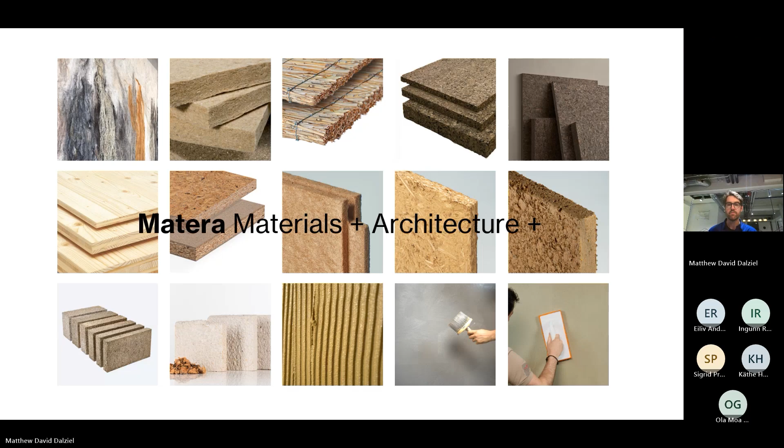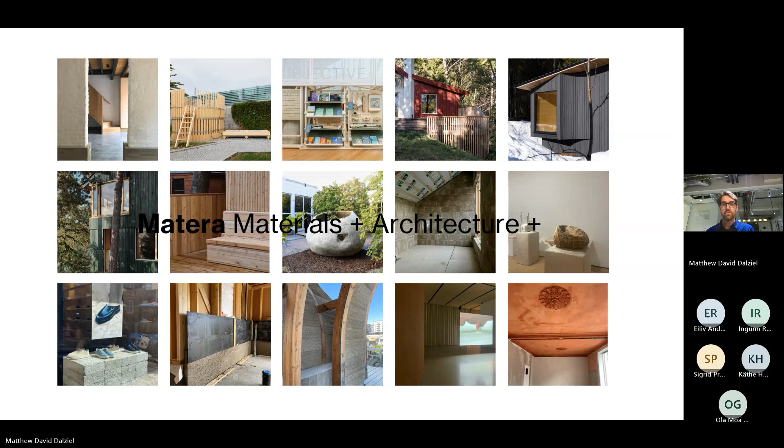The story of Matera starts really 10, even 15 years ago, when I started to play around with bio-based materials, living in London as an architecture student and then as an architect, and then continues through to today. So I will talk through these projects and through each of the materials as we go.

The first thing to say is that, of course, the discourse of sustainability is highly complex. One of the things that I've been doing to focus the way that the practice works and how we work with others is to try to have some kind of key principles.

One key principle, of course, is that this is a design-led practice. So we are as interested in the beauty of these materials as we are in the carbon footprint of these materials, or their capacity to perform as energy efficient partners in a system.

I think that's really important, to remember also that sustainability can be beautiful, and the practice of making a kind of regenerative architecture can be an engaging, creative practice.

One principle from the technical side that we really focus on, which helps us to get there, is that we're very focused on natural ventilation. I personally think that this diagram that comes first from space research and then becomes the passive house standard, which has resulted in most new buildings being made as a plastic bag regulated by a machine, is a very strange way to treat our species.

We should have a physical relationship with the materials around us, and making it that the first material we touch is really like a plastic lining which isolates us from the world is kind of philosophically and technically weird. So the approach that we take is making sure that the wall is vapor open and that the materials have a capacity to breathe and to hold moisture and hold heat. And that tells us a lot about the kind of materials that we can use.

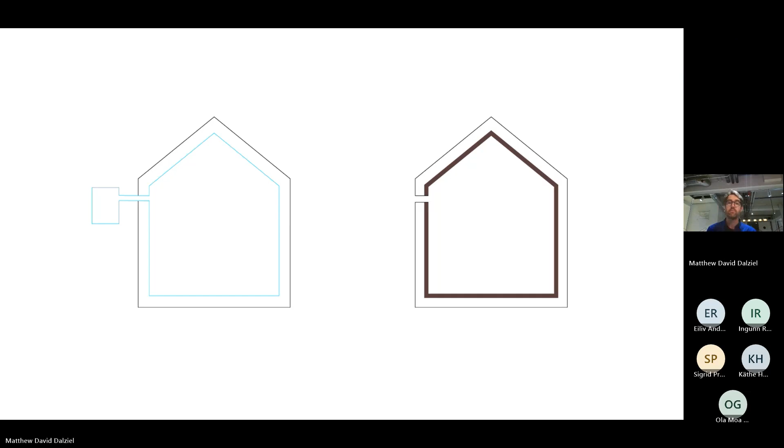When you start to look at how to build a wall as a vapor open system, you have all of these layers. And sometimes a single material can operate as all of these layers. That's a kind of architect's wet dream in a way, to make a solid stone wall that can be thermally massive and insulating and materially rich all in one layer.

But often, and especially in competition or comparison with the way that we build as a standard form at the moment, what it means is looking at a lot of different layers and how they react. One thing that's very interesting, and I think a big selling point for biogenic materials like these, is that the way we build at the moment with these kind of technical layers and airtightness and plastic means there's a high degree of risk of failure.

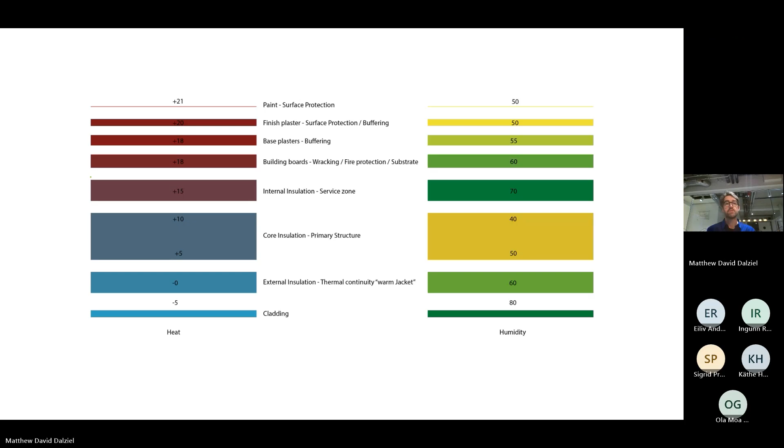If tapes fail or membranes fail, then the rest of the layers fail. Whereas when you start to build with natural stone, cork, clay, wood fibers, hemp fibers, and all of these materials on the table here, all of these materials have a capacity to dry out. So they can stay there for 1,000 years, if the roof is on. So there's a way in which not only are these materials already inherently low carbon because they're made mostly of harvested plants and some minerals, but it means there's a kind of inherent longevity in the materials.

Just to say a little about where I come from. I speak with a bit of a mid-Atlantic accent because I was born in Canada and grew up in the UK. I studied architecture in the UK, and afterwards worked for really two practices over the course of 10 years before coming here. The first was Haworth Tompkins, very well known for their cultural buildings, particularly for transforming and extending historic theater buildings. I think that's really where I learned a lot about the capacity for materials to tell stories, to draw histories forward, to talk about the future, and to be these tactile agents, almost like performers in the space. That's been really formative for me.

The other element, which then naturally evolves into what I'm doing now, is that I worked for 5 years at Webb Yates Engineers, running a small architecture team within that studio with a partner. Webb Yates, some of you will probably know, have been for a long time very active in promoting the use of natural stone as a structural material. They have this project called the New Stone Age, and in fact now they're building a 12-story residential building with structural stone.

This was the first one, Clerkenwell Close. They built it with Groupwork + Amin Taha Architects, really quite brutally expressing the structural stone. I think that particular project, and a lot of what they do within the practice, is a great example of how approaching sustainability from a creative praxis perspective and method is super exciting.

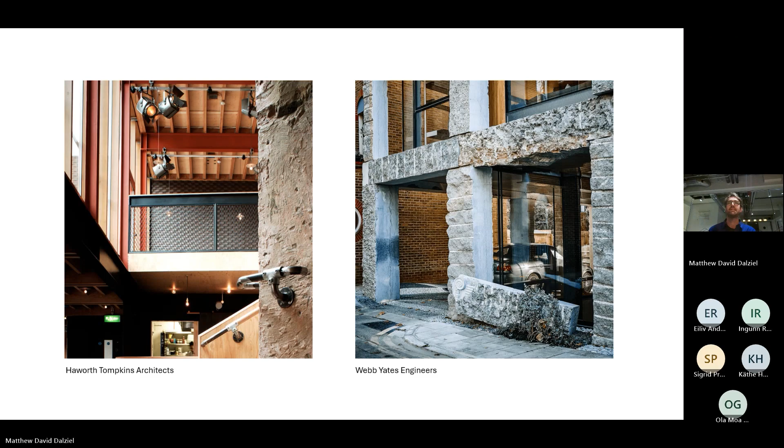And it's a different perspective on extraction. That extraction can be a bit like, when we extract, we use the whole animal. Like when we kill the pig, we feed the pig and then we eat the pig. So I see natural stone as a kind of responsible way of using these more precious materials within the palette.

During those 10 years, while working in those two practices, I was restoring a ruin that I was also living in at the same time. This was my kind of hands-on tuition on bio-based materials, which was sort of forced upon me because I managed to buy this bit of historic London, which had been utterly destroyed by modern materials.

This is a bit of the plan on the right-hand side, where the dining room and living room are, is the servants' quarters of a larger Victorian house. The rest of the plan is an extension which tries to express a playful nod to the bay windows that happen on the rest of the street.

What had happened was that the house itself had been injected with chemical damp-proof courses and plastered with cement, lots of plasterboard and glass fiber insulation, and it had become virtually uninhabitable because it was so damp and cold and filled with fungus. The only thing to do was to take all of that away.

This is a 50 square meter house, and we took, I think, 70 cubic meters of waste out of this building by scraping away layers. We literally filled the yard, where the extension came later, with rubble, and then experimented with using lime, hemp, and sheep's wool, developing relationships with local forests where we get oak and larch from English forests. I did all of the work myself on weekends over those 10 years, and really got to know what's happening.

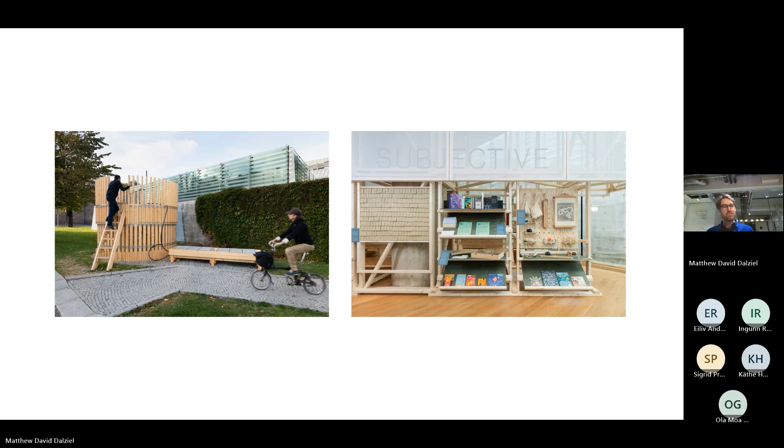Then outside, with students from a studio I was running at the time at Aarhus, we built this installation, a 14 cubic meter compost pile that heats a public bench through the bioreaction of the compost. Through making that project, I started to think about what I could do with 14 cubic meters of compost, and later the project—the house and garden I'll talk about—came to be.

It's interesting to think about how the architectural baggage we've inherited from the neoclassical tradition of having heavy bases isn't essential—it's just, in fact, an architectural style. Not every project needs a heavy relationship with the ground, especially in urban environments, but there are many projects where a much lighter relationship to the ground is possible.

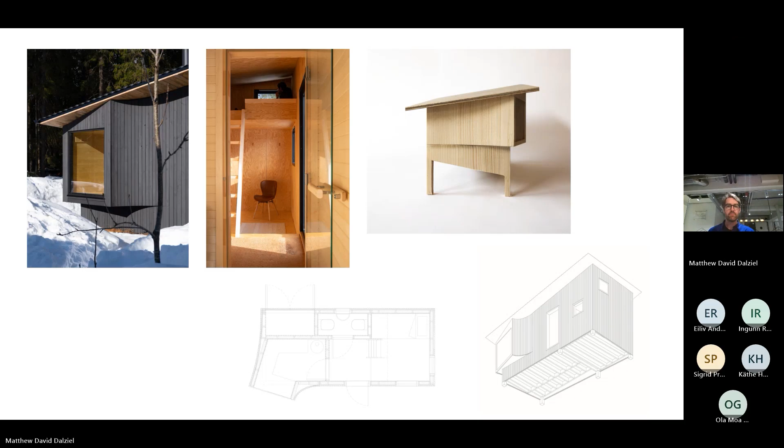Then another project came in the next Triennale, answering the question of mission neighborhood, asking about more-than-human neighborhoods. When we think about making good neighborhoods and good cities, we almost always immediately think in the human perspective. So this installation was talking about the tradition of food forestry and agroforestry, which are really in parallel to regenerative construction and architecture.

Agroforestry is revolutionizing, or at least troubling, industrial agriculture, and you see a lot of moves towards companion cropping where forest methods are being used. This was an installation where a living forest is placed inside a hemp and clay sculpture where you can put your face in a hole, and you're transformed down, like Alice in the Looking Glass, to a scale where you can imagine being in this food forest.

And those two projects, the lightness on the ground and this idea of the food forestry project, became the house which I built for my family, which is also, because I haven't quite finished it, the main case in a works-based PhD that I've done at Aarhus.

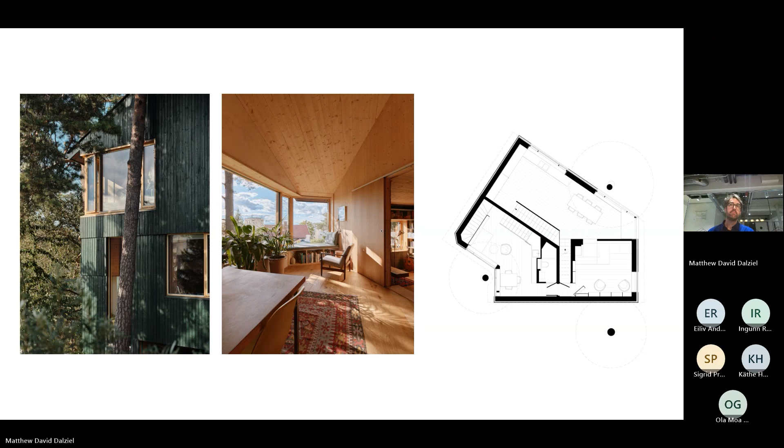And so I've been speaking a lot and working a little bit with Norges Vel, trying to drop the ban on hemp and develop that discourse. The hemp for this house, in fact, came from France. But in the meantime, the first refinery for hemp shiv and hemp fiber in the Nordics opened in southern Sweden. So now we get our hemp fiber from Ekolution, southern Sweden. So it's coming closer all the time.

And this is how the house is built: the CLT elements are basically the internal walls and the floor and roof structure. So it's a kind of house of cards with no structure on the outside, all prefabricated. Then the outer walls are a 6 centimeter wood fiber plate with lightweight stud work, 50 by 100 studs, that are basically there to hold the wood fiber in place.

We did that because the process of casting hempcrete, which is a blend of hemp and lime, when done as an in-situ system, needs formwork. By having that wood fiber plate on the outside, we not only protect the building from the elements and allow the drying time of the hemp to extend into the shoulder season of autumn, which is essential in Norway, we also get a little spike on the U value from that 6 centimeters of wood fiber. It's permanent formwork, so it decreases by half the waste that's used, whereas we reuse the inner formworks, maybe 6 plates of OSB for the whole house that we just moved around. So the inner plate is a sacrificial form, and the outer plate is a permanent formwork.

We geared the thickness of this wall so that it absolutely just passed. We did a total energy calculation and made sure that we were only just in the green in the SIMIEN calculation, because what we wanted to know was that all of the gains in energy efficiency we had were gains because of material, not gains because of extra performance.

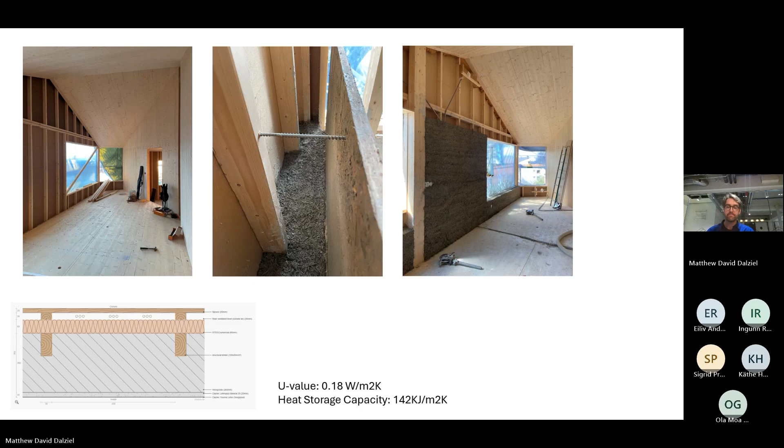The heat storage capacity is an important element of that first principle I talked about, where fresh air is coming into this house, and the energy used to heat that air is held in the walls. So when you open the windows to get extra air, if you have 30 people over and the CO2 goes up, you could open the windows for 10 minutes, close them, and the temperature is essentially the same in the house, because the delay that comes from having the mass is a kind of performance the house is capable of.

So the palette of the house - this is actually the acoustic wall between the apartment and the house, because it's a kind of double house.

We used clay plates, wood fiber, hempcrete, and wood fiber on the floor and CLT. On top of the hempcrete, there's 15 millimeters of clay plaster, a base plaster, and then a fine finish plaster, which comes in lots of lovely colors.

This project was then the beginning of developing these trade relationships, which we now have, where we're the kind of ambassador for all of these products in Norway.

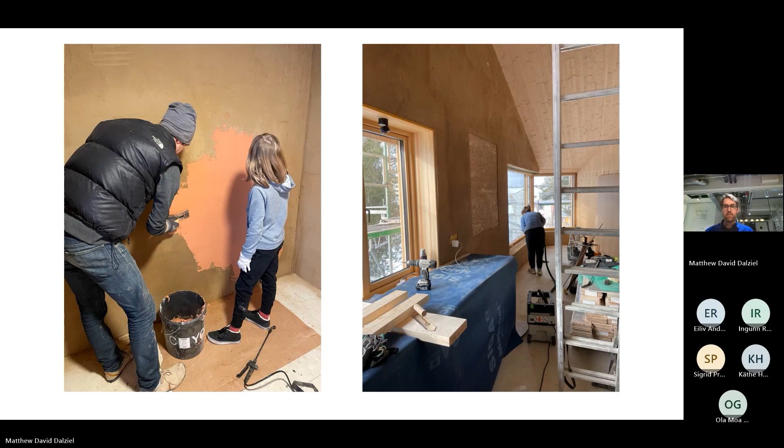And then I want to talk a little bit about... Go on. Yeah, just before, was that floor - one more please - was that floor heating? Yeah, so there's water pipes.

This house could be completely naturally ventilated. We took the approach that because we needed heat anyway, it made sense to use a waste heat air pump - so it's an air to water heat pump.

One key principle for me in terms of sustainability is that architecture should be slow and technology is fast. That means the technology should be hot swappable, and buildings designed to last for 500 years should not be too tightly tangled with anything that's going to become obsolete.

So this building has one machine, which is plugged into one duct, and we can swap out that machine. The interesting thing about an air to water heat pump is that it has two coils: one connected to the heat exchanger, and the other you can connect to whatever you want. So we've been thinking about - can we connect that to the compost pile?

Can we connect that to passive solar heating on the roof? So there's also possibilities for upgrading where that hot water comes from, but the hot water is the heat source and the domestic hot water in the house.

That makes a very comfortable environment where the bedrooms are downstairs and the living spaces are upstairs, so the bedrooms can be a lot cooler. All the fresh air comes in on the lower level, and the upstairs becomes this kind of warm cocoon where the hot air rises and is captured right at the top of the house, in a kind of typical naturally ventilated diagram where you have a vertical section with air coming in and making its way up.

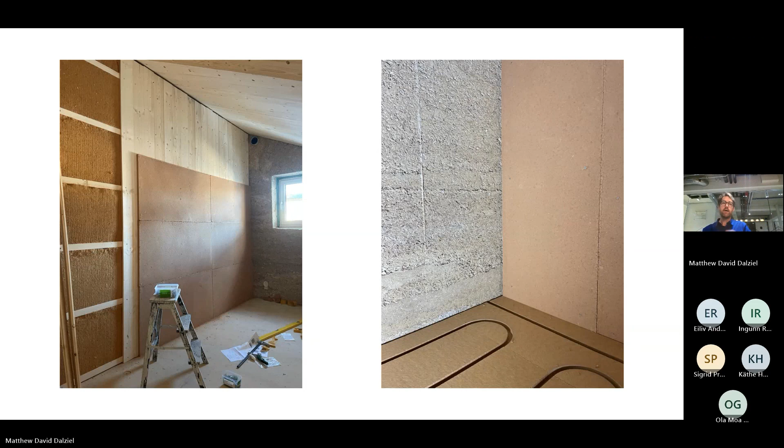I want to talk about this project a little bit, because it was a kind of performance art piece where we made something that, on a cost per square meter basis, was less expensive than normal people could afford, since I literally built it myself. There wasn't any labor cost, and it was partly funded by a PhD, so it was a kind of off-the-system experiment.

Coming out of that, we really need to know about the standard wall that is built in Norway, 600 kroner per square meter, with a heat storage capacity of 16 kilojoules. This is a super optimized wall section, optimized for two things: meeting regulations in terms of isolated energy performance, and cost.

For me, the only thing I can compare this to in the world is a McDonald's hamburger. It's something optimized absolutely for cost, and it doesn't produce a healthy world that I want to live in. And that's the challenge: the first wall system we're working with now is 2 times the price of this.

So we can't just compare those on square meter costs. We have to say all of the reasons why that 2x price is both a fair and a good price, because it's doing all of these other things.

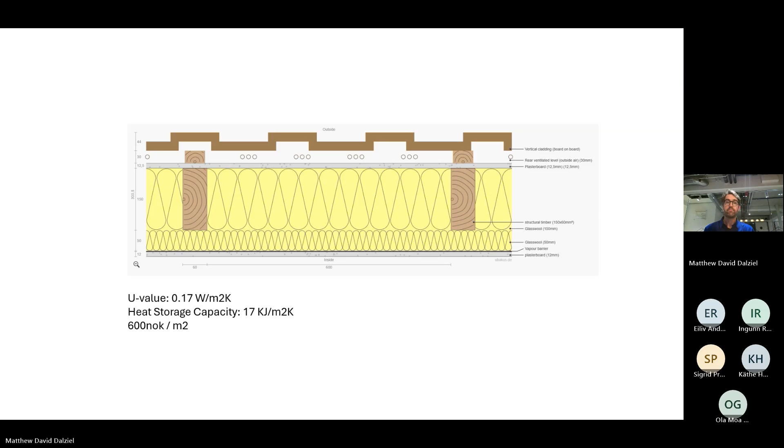So the first step to answering the challenge of a wall section built as a vapor-open wall structure with this capacity for heat storage is to really reduce the amount of hempcrete in the wall. This could be another material—it can be more clay, for example.

This is the second project, actually the third project we've done with hempcrete in Norway, now almost finished on site. What we're doing here is increasing the amount of wood fiber and decreasing the hempcrete layer, or thermal mass layer, effectively the service zone layer that's in the glass fiber or mineral fiber wall section—your fire layer, airtightness layer, and thermal mass layer.

And you can see it still has 105 kilojoules, which is more than enough. As I understand it, anything above about 50 kilojoules gives you a good amount of thermal mass for the performance.

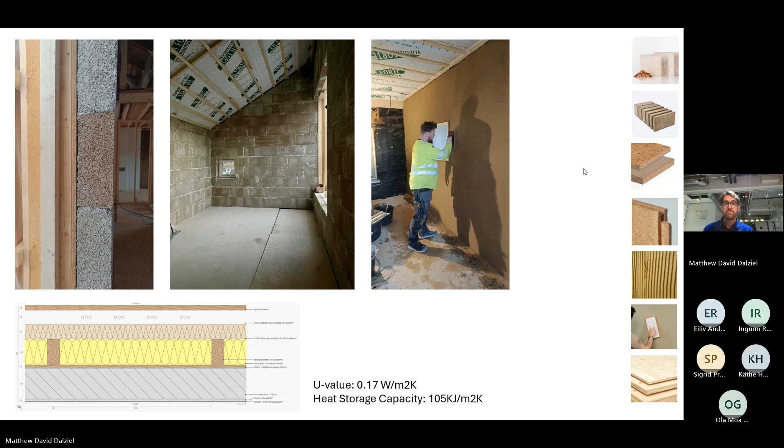This project is interesting because we've been able to use a lot of the materials we're working with: lime cork insulation, hempcrete blocks, formaldehyde-free OSB, wood fiber plates, clay plaster, and also these 3-layer micro CLT plates that we use a lot for furniture in the projects.

We've also been lucky enough to get money from the Klima Fund from Oslo Klimaetaten, and are working with NMBU to do real-life testing on these 2 projects. We're putting sensors in the walls and doing a 2-year project measuring what the moisture is doing and what the real-life U value of the houses is.

We already know from living in the greenhouse, House for a Forest, for almost 2 years—now we have someone living in the apartment too, so it's gone up a little. It was about 30 kilowatt hours per square meter, now it's about 40 kilowatt hours per square meter, but that's something like 60 to 70% better than standard.

That's more or less what the literature said hempcrete should be doing, because of its hygroscopic dynamic effects—absorbing and releasing moisture, absorbing and releasing heat—effectively working as this passive machine to help the real, active machine not have to work so hard.

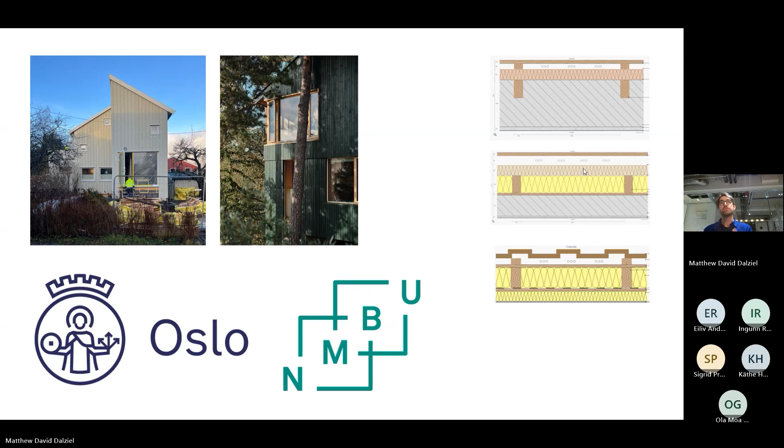Moving from new build to restoration, one of the first projects Matera did at the beginning of 2025 was with an interior designer from Mad Architecture, for a house she and her partner bought. They discovered it was actually a log house—there was no evidence of that from how the interior had been fitted out over the years, but we scraped it back to the logs and found the logs had rotted in a lot of places. Windows had been moved, and because the ground floor is brick and the upper floor is logs, the lower 3 courses of logs had rotted away, with props put in to hold it up.

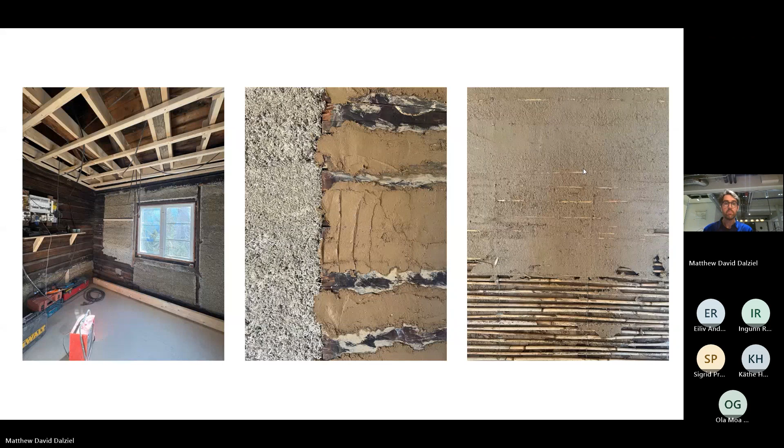So hempcrete became a really interesting way of patching that solid core of the building. We used reeds as an isolation layer from the movement of the logs, and clay plaster on top—you can see the build-up there: first the repair layer, then the reeds, then the base clay, and then the final clay.

The other thing we're doing, hopefully with some funding in the next stage of the project, is introducing this cork lime plaster to the outside of the system. We have a sample here, and I'll show more in later slides. It's basically a lime plaster blended with cork aggregate, and it has a U value on the bag - it says 0.037, though they've now actually got a 0.035 measure for it.

It's the same principle as hempcrete, in that it's a bio-based fiber, or in this case a bio-based aggregate, storing a lot of carbon from a regenerative forest practice, because cork is a bark that's harvested every 10 years. The lime is the binder that protects that biogenic aggregate from degrading. Although the lime has a carbon release in its life story, it's also a protection to make sure that building can stay for 500 years and hold that carbon. Also, the lime is reabsorbing carbon through the carbonation process, so the longer the building stands, the more carbon positive the material becomes.

This material is super interesting for us in the Nordic region in restoration and transformation, because we can add a thin layer of this to an old log building or old masonry building and really get airtightness and a boost in thermal performance. Also, when applied on the interior of buildings, you get a surface which is warm to the touch, so the surface temperature comfort is very high.

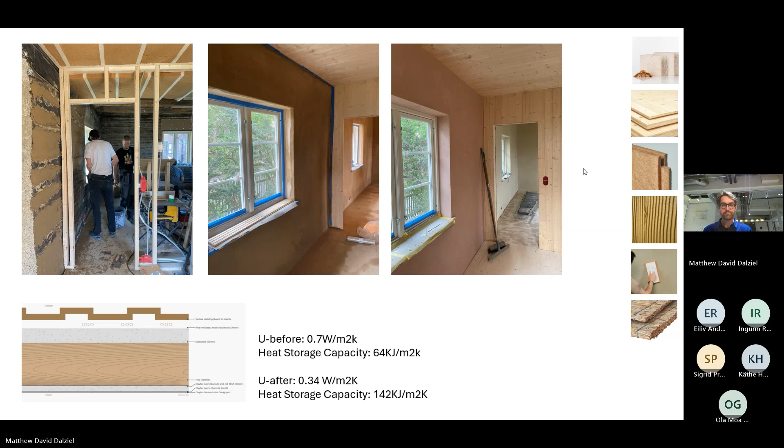You mean you're spraying this one? You spray that on, yeah, exactly.

This is a demonstration - the product is made by a company called Diasen in Italy, and we took some architects there late last year, and this is them proudly demonstrating spraying 16 centimeters in one go. So it can be sprayed very, very thick.

One of the things is, although this material is of course more expensive than lekting ut with glass fiber, the speed and the kind of single activity make it almost cost neutral, especially in thinner layers.

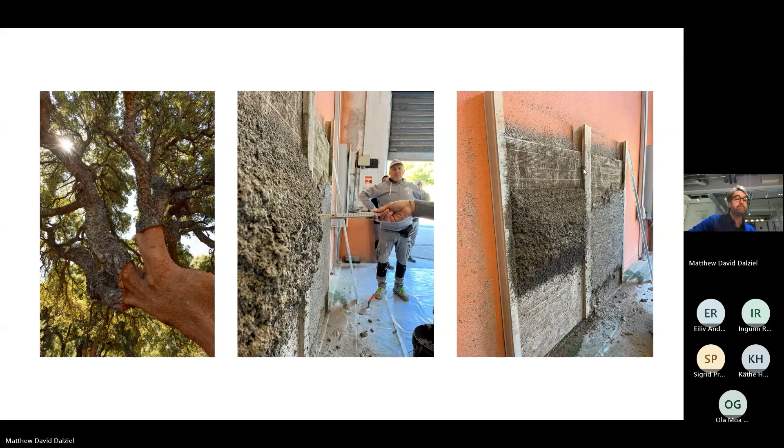This is another case study from last year where we worked with one of the partners from Skapa and his wife on their house, where they have a concrete basement where they've made 2 apartments. We basically did a study where we said, okay, you were going to lekt ut with mineral wool or glass fiber insulation and plasterboard in the standard way.

We know what the cost of that is per square meter - I think it was something like 300 kronor a square meter, materials only. Then we can look at the cost of this, which is something more like 800 kronor a square meter, but we can spray 500 square meters in a day. It's the insulation and the finish, but it's also protecting that concrete wall and the inhabitants of these apartments from moisture and salts, creating a healthy situation for both the building fabric and the occupants.

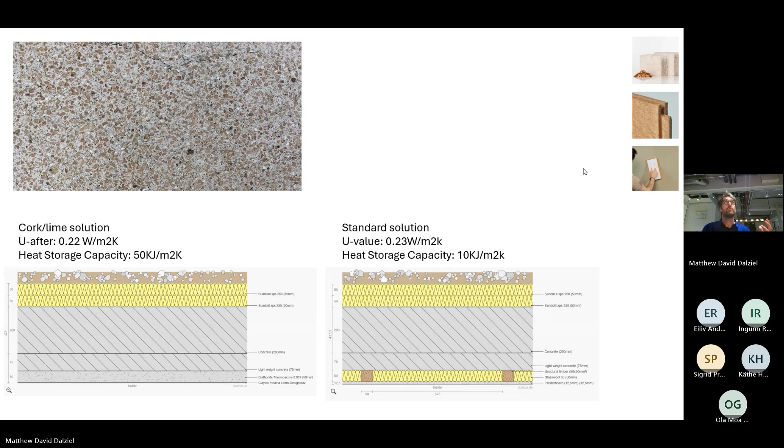What we found is that the speed of it brought the cost down - I think they would say it was still a little bit more expensive, but then you have all of these extra benefits. So that's really the game we have to play as ambassadors to these other ways of building: to talk about the other value factors that come into play when you invest in these materials. And of course, the price of these materials will also come down with availability.

This is another project, the second in situ cast hempcrete project we did with a local architect in Hamar. It's a good example of how we work with other architects and entrepreneurs. On this project we just supplied the material, consulted on the detailing, and I trained the mester on how to do hempcrete. I was only on site for a day, then they ran with it. This is how we like to work at Matera, being hands-on with these materials so we can train people to use them, making it an infectious practice where we show you how, and then you can go run with it on your own projects.

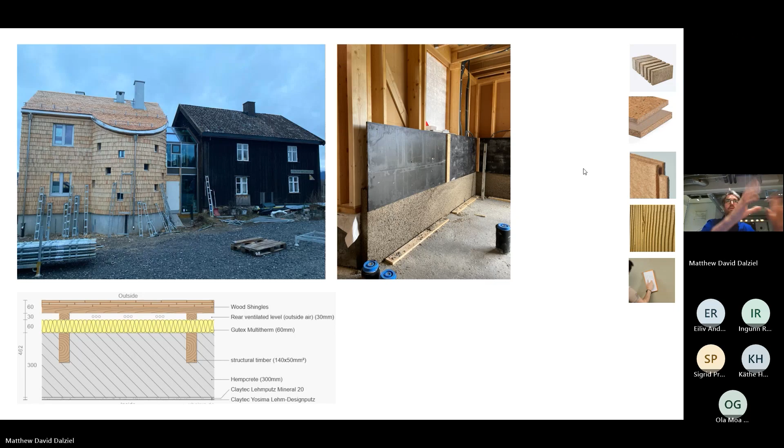On this building, the plaster is basically falling off anyway, so we reapply a new plaster with the same thickness, but with a U value of 0.035. That's breathable, warm to the touch on the inside, and I can't remember the exact EPD, but it's pretty close to carbon neutral because of the combination of lime and cork. You can also see other materials in these pictures, where we're using clay plaster.

This is an example of how you can use clay plaster directly on old finishes. This is just like the wallpaper that was there. We put a mineral primer directly on the wallpaper if it's stable, and then this Yosima clay plaster, which is a 2 to 3 millimeter thick layer, directly on the old surfaces.

Going back to that diagram I showed at the beginning with the layers, every layer matters. Even if you just use clay, a lot of people think they can't switch to vapor-open systems because they already have a fabric made of vapor-closed systems. By putting that skin of even just clay paint, 1 millimeter, you create a porous surface area that's doing something. Of course 10 or 15 millimeters of clay does much more. The first 1 to 3 millimeters is really doing more about moisture than thermal buffering, but it's still worth doing.

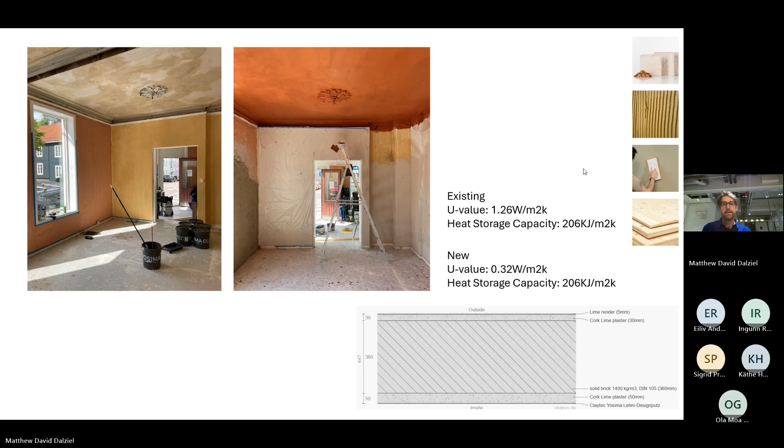This is a project with Lusetter - the bakehouse at Lusetter, which had been made as an art project and got permanent status last year, so it needed some restoration. The wattle and daub clay plaster it had originally been made with was actually falling off and quite dangerous.

This is, we hope, the first phase of several phases to extend the useful season of this building and participate - biogenic materials have a very close relationship to the urban gardening movement, so it's very nice for us to be part of that community.

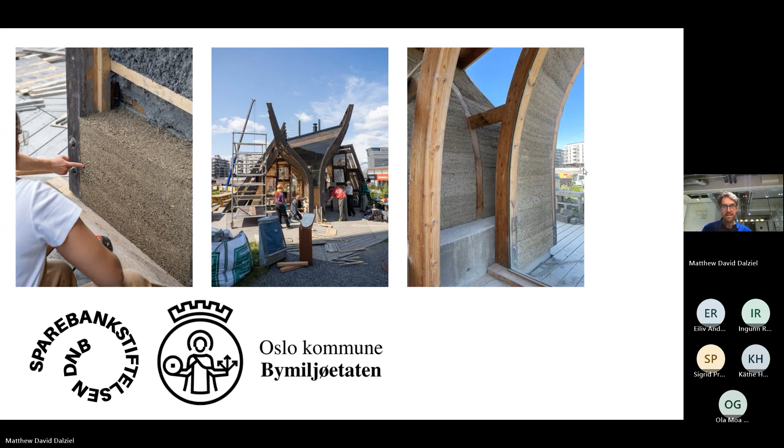I think this is another use case where, by using clay and wood fiber instead of plasterboard and plastic paint in exhibitions which have a very short turnover, we can really decrease the amount of waste coming out of the cultural sector. I'm very interested in continuing to work with the National Museum and others to change the specification of the materials they use as maintenance and exhibition materials.

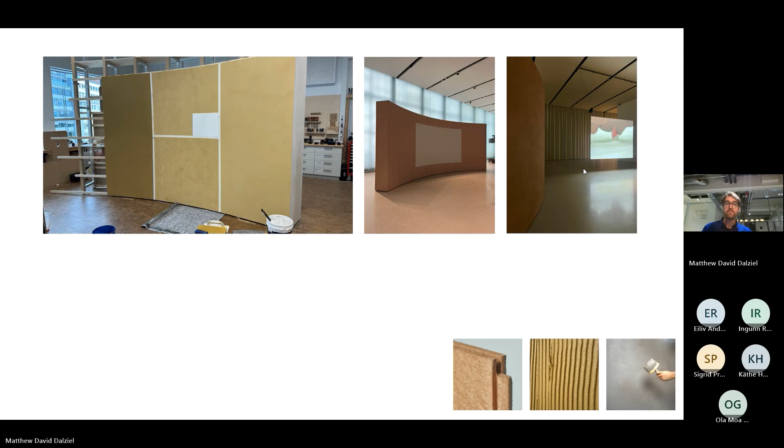So we have another project with the National Museum happening now, which is very exciting. And that's the exhibition. I will just end there and say thank you very much.